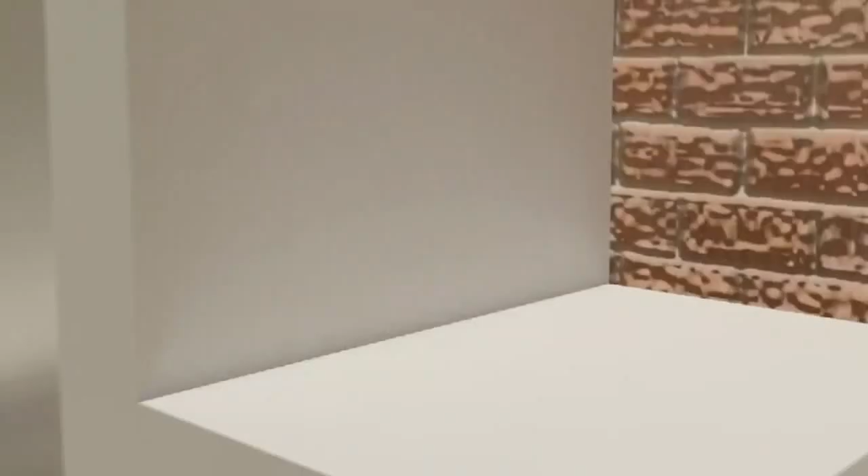Hello there, this is Paul Ugwu, Architect. Today we'll be looking at our submission for an international architectural competition for the Taichung Cultural Center in Taiwan. The key elements of our submission are as follows.

First, let's start with the design philosophy. Our proposal is modernist and avant-garde. Our approach is to produce practical yet experimental ecological and experiential spaces and buildings.

We get our inspiration from nature. We rationalize and synthesize the complex variegated order found in nature. We look at the environment of our buildings and produce designs which respond to the setting and prevailing culture, in this case the Gateway Park at Taichung.

The process of architecture creation in the 21st century is in the middle of a technological revolution. We have adapted and integrated these technologies into our design processes by producing buildings that respond to scripts and algorithms as tools of morphogenesis, meaning the shape of space creation. This parametricism, our preferred approach to morphogenesis, ensures the buildings are ahead of their time.